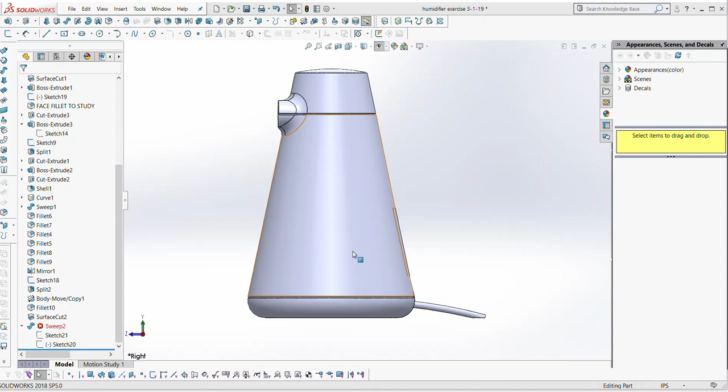As part of Project 3, I hope you guys are fully aware of this, and I think you are, but I've said it before: you have to render this to match the rendering that you have picked. So the exact piece of paper you have, that's what you're trying to match, and that's what I'm grading you guys towards, okay?

Now, in an ideal world, you would be able to find this image and find like a side view orthographic of it. Probably not going to happen, but if you can, I would start it the exact same way you started the bottle. You have that side view, you drop it in as a reference picture, and you actually trace it. If that doesn't work, you can totally drop in—I think I did it on my file.

Let me open up the original. No, this is the wrong one.

Yeah, you can literally drop in the exact picture reference, and even if it's not—whoops, let me do that. Yeah, there you go. See, like this picture was not an orthographic, but because I know it's a revolve, I was still able to get the rough angle of it, and I was able to get the rough height of this.

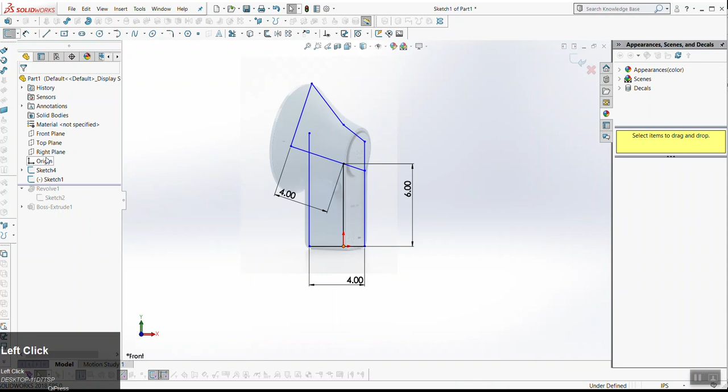And now if I rearrange my sketches so that my master sketch is below, you know, maybe 4 inches is a little wide—maybe it's like 3.75. But now I can start to try and get what this angle here equals to. Maybe this needs to poke out a little bit further.

So the way that I've built this, I've started with a revolve of the speaker area. You'll notice that some weird things happen, right? Because it's revolving at this angle from here, we get a point on the back. In fact, I would actually recommend that you build everything in halves. So in this instance, if it's a blind revolve, I would dial it into 180 degrees. Then my gut was to say, okay, if I extrude this, what does this look like? And you can see there is nothing smooth about this, right?

Now part of that is, okay, how wide should this go? So in your master sketch, let's see, how would I approach this? I would probably go to my master sketch. Honestly, I want this to be parallel to this because I want the edge to be flat, even though it doesn't quite align well here.

I can adjust this later. It looks pretty close—I can maybe move this up so it's a little bit in between. And again, it's not a true side view. While I'm in my master sketch, the other thing I want to check is what this distance is. Let's call this an even 3.15.

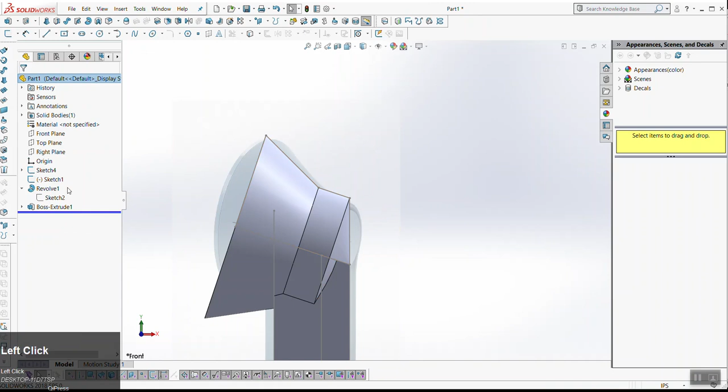That gives me the diameter of this revolve. That means then that if I extrude this, again, I'm building half of it by 3.15, it should align tangentially to here, but it's not. Oh, it is, okay. There we go.

So now we have this smoothness through here. But of course, we notice there's this gap here. The way I would fix that, sometimes in SOLIDWORKS, it's generally easier to remove than to add bodies, because by removing we can remove exactly what we want and have it be smooth.

So here's an instance where I'm going to deviate from my master sketch. Remember, the goal of the master sketch is that everything is still pointing to it. By moving these lines way out and making this perpendicular here, I now get a really nice long blend.

But now, for a minute, I'm not going to merge this result. I'm going to uncheck that. Or no, let me rethink this. Sorry, we can leave that merge.

What I want to do is just a flat cut on the back here, not from the revolve. So on this front view, I'm going to pull this line from my master. And again, I'm trying to avoid that point that I got. Hopefully you guys all saw that.

I'm going to extrude cut this. I'm extrude cutting just a line. I'm making the setting to be through all. I'm going to flip the side to cut and remove all this extra stuff from the back.

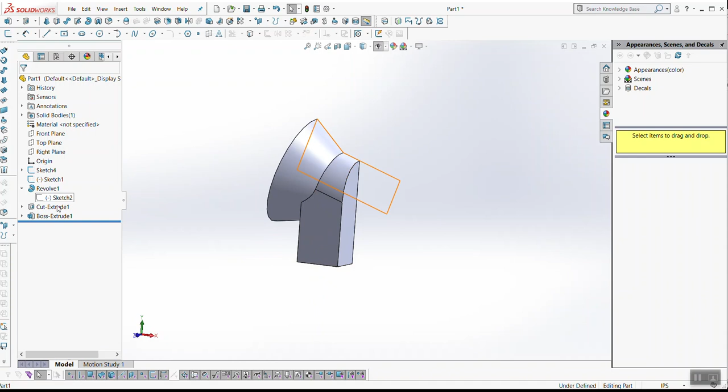No, that's great. If I'm looking at the details of this, honestly, like if this is just the starting point, really the nuance is, it looks to me like the back actually kicks slightly here like this.

So in reality, like this cut here, if you want to be a little bit more accurate, I would probably pull this part of the sketch, trim this here. And now we have this slight kick in the back.

So, okay, here's where it gets a little bit trickier now, however. Well, firstly, my proportion looks a little off to me. It looks like it should be taller.

Here's again where it helps to have this sketch in here. And now here's what I'm noticing, right? Look at, this represents the center line. And look where it's meeting. It's like way below the center.

So here, I might define this height overall. Take that away because I don't want it to move up. I just want to move just this so that it looks a little bit more centered here in the center of that disc on the back. Move this down.

But of course now this changed, so I'm going to have to change the extent of my extrusion here. So let's change this to 2.3 even. So now my extrusion needs to go to 2.3.

Let's see, what's a more clever way to do that? I could do this. Instead of always having to constantly tweak that number so that they match, I can change this instead of blind to go up to vertex, and I can select this.

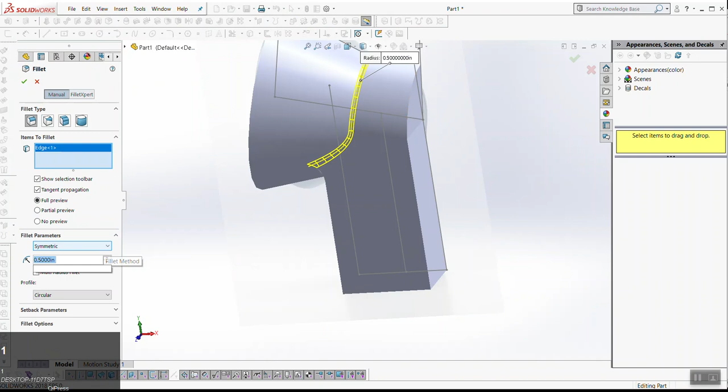Let's see, and to run a fillet along this way. Honestly though, it's probably better. Like honestly, this fillet could maybe benefit from being, what's it called, a face fillet with an even contour.

You know what, for this project, I think that's okay. This will get you close. The key in here though, that I would do a variable fillet, because it looks like it's really a big soft into a tighter fillet here.

So a variable fillet is you pick a line and then you pick two different values. Right, yeah. Now, I'll be honest, I don't love this. Really the best way to do this would be with a surface loft.

Because you get this weird point here, is mainly why, and then this transition is going to look funny. I mean, you might - oh yeah, don't do that. Look how it cuts in, that's terrible. Don't do that.

You may be able to get away with like a - let's see what just like a really small fillet in here looks like. That's still not quite what I'm seeing in this file here.

I wouldn't. You could, okay, you could maybe try and align this and this a little bit better. You see how offset those are? That might help, so if that's maybe what you meant, that's one way about this.

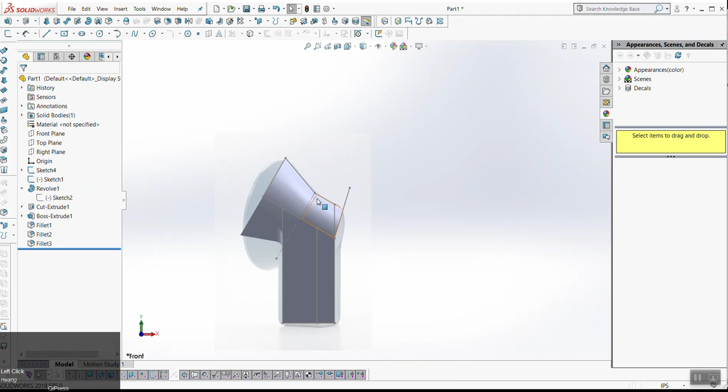Let's see. I think if we put a reference line here and make it perpendicular to this, and for construction, we can kind of align this with this gap, and I think that should align it a little bit. Let's see what this looks like. Yeah, this is aligning them a little bit closer by doing that, but now the proportion's like way changing, unfortunately.

And again, I am grading you guys on accuracy of how closely you can replicate this. Let's see that. The fact that I want this to be parallel to this is somewhat constraining too. It's not ideal.

So okay, let's look at this. How might we do this with a loft? You could use this. Okay, so I'm going to pull this line here,

and I'm going to split this. So before we were using splits to create windows and stuff. This is honestly a more proper way to use a split, is to say, okay, I have my bodies. Now I just literally want to work on just this part of the body.

You might, if I'm looking at this, while we do want fillets as late as we can get them, in this instance, again, looking at this, at the image, we have a small fillet on this edge that runs around the bottom. And essentially, we want to loft this body to this part of the cone.

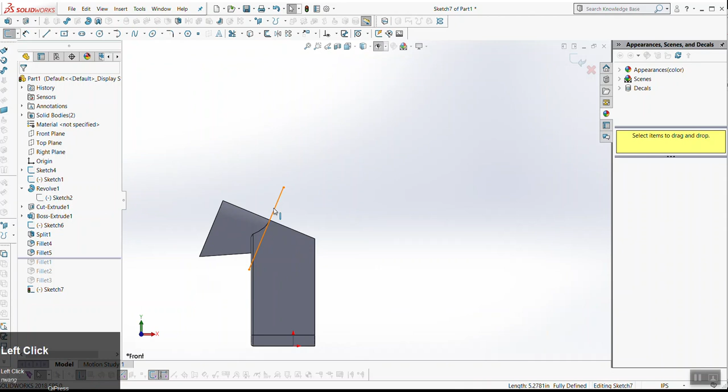We could, let me try this. I'm using this just as a reference here to cut something. You know what, actually, let's leave this. Right, this is kind of rough, but I'm just going to go for it.

I'm using this kind of U shape to cut out this intersection between the two of them, and I want to keep both bodies. So I'm going to click OK. The reason that I put this fillet in here is so that we don't have a corner. It's nice and soft through here.

So these fillets are a little bit higher than I'd like, but I could, in theory, I could now try lofting this face to this face, right? Now the key, though, in this loft, well, firstly, we probably need some more guide curves in here.

So, but this is where we could use this other body. I now kind of have a built-in guide curve right here. You would probably want... you can see how it's a bit still wonky here. Let's try this, if this does anything for us.

This is where you might want to use, well, for sure, let's see this front face, we can get a sketch going. This is an instance where I for sure would use, where I think it's acceptable to use a spline. Because I want to go from here to here, and I want this to be tangent to both.

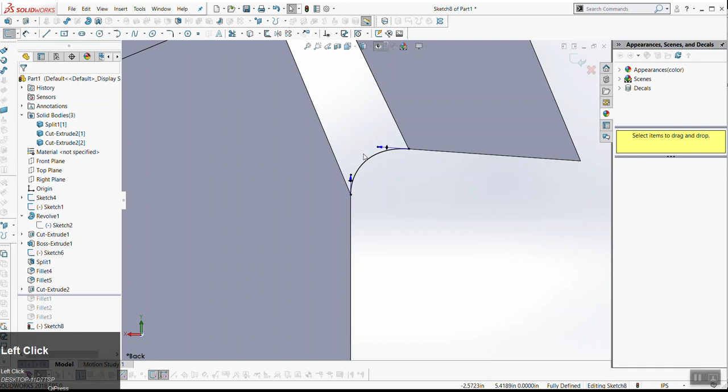And I want it to be as soft a curve as I can get, and I don't know how many arcs that would take, right? This is kind of an obscure shape. This is also where you may want to use a 3D sketch, okay? So let's start, before we get there though, let's look at this.

Let's just see where we've gotten with our guide curves here. We can use this as a guide curve. You can see this is already looking smooth. We can use this as a guide curve too. And actually, we may not need a 3D sketch at this point. That's looking actually pretty good.

We want to look at what we're merging. Are we merging the result? And if so, to what? I think we can merge to both. That's fine.

Yeah, it's not perfect, but no, it's better than what we had before. We can now see kind of like what a fillet through here is going to do. There's kind of some weird things going on but it's on the right path. I think it's better than the fillet that we did earlier.

But what's weird is that this is a bend. This is a concave bend, whereas this is a convex bend. Meaning to say that this goes in, this goes out, and filleting along that edge is tricky. We could try and add tangency to this loft.

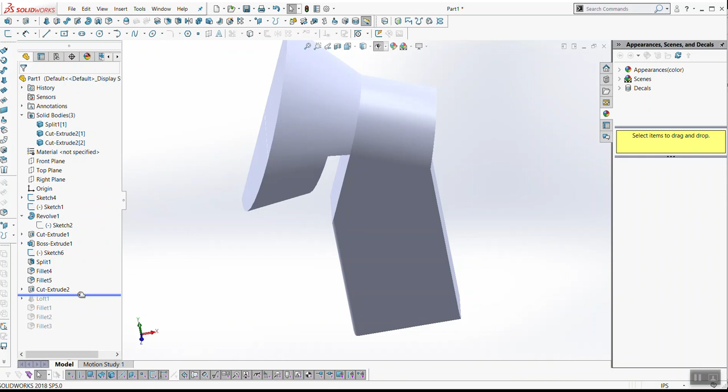I would at least rather speak towards it. Let me look at this. My hope with these exercises was to give you guys an approach and have you then fine-tune it. I think this is along the right path, you just want to tune in this loft. I think you could get away with it with fillets, like we did the first time. For this class, here's the other approach: let me blend all this back together.

Here's where you could use, for example, think about the orientation of the fillets. I put this fillet on here first, so now this gives us a more consistent blend throughout all of here. This may be an instance where you want to use a face fillet and keep this chord width symmetric and see how big you can get this. This may be an acceptable workaround for this class, without getting into more—honestly, that's probably what I would do.

In a perfect world, with more time, I would totally get into surfacing, but it's going to be too much for me to dive into and touch with everything here.

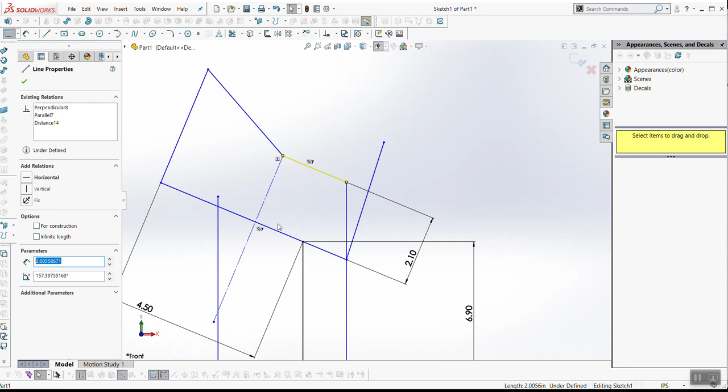If you want to look at my tree here, let me sum up the key things for you. One: set up your master sketch something roughly like this. I think it's key that this part of your cone is parallel to your revolved center line, because that's how you get a smooth blend on the outside. Essentially, your object is constructed by a revolve and an extrude. I think the key to getting this smooth is the order in which you have your fillets.

In this case, I filleted this edge here, then I filleted this corner here so that I now have this clean line that runs all the way throughout. Now if I throw a face fillet on there with an even chord width, I get a pretty even, smooth blend throughout here. It's not ideal, but it's an acceptable workaround, and it will get you a rendering that looks pretty close to what you have here.

Right. Yeah. Short answer, yes. Let me give you a longer answer.

So let's look at this, Project 3. The complete project, obviously you have the SolidWorks model, but there's two: the replica and the redesign. You will have the original render from the internet, so each of you needs to find this. If this was not the image you brought in, try and reach out to the person who has it. If any of these are my images, I will throw them on Box—2 of you have my images, 3 of you have my images—I will throw them on Box so you have them. Try and figure out who brought in the original image and see if you can get it from that person.

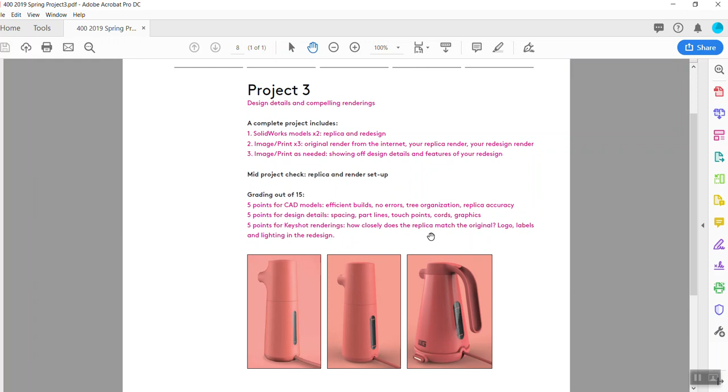And then 5 points for the Keyshot rendering. How closely does the replica match the original? And that's literally, I'm looking at both and I'm seeing how many differences there are. And you want to get that as absolutely close as you can get it, yeah. And then of course logo, labels, and lighting in the redesign. Does that answer your question?

Awesome, that's great. It's very similar, yeah. Okay, cool. Any other questions, Scott, on your model? Okay. Do this.

So Ned picked this drill. Good choice. Also going to be a little tricky, but you got this. I have faith. Awesome. You have lots of reference. That's good. Okay. So again, let's see.

If I'm looking at this as a drill, I would probably put the origin right in the center of the barrel of the main shaft. So I'm going to, yeah, thanks, Scott. So I'm going to make this coincident. So this represents the main shaft of the drill. This represents the handle. Just guessing on size here.

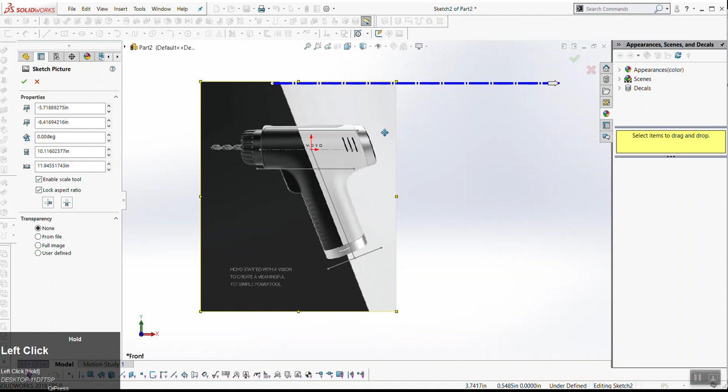And maybe I do want to align this right in the middle on that part line. And then from here I would change this transparency to, again, just knock this way down so it's not too distracting. After I exit that sketch, I can now rearrange them. I can drag my master sketch below, and now when I edit my master sketch here, I can make some adjustments to match this.

So get this to be a little bit taller. You know what? That means I need to scooch my reference sketch down a bit. That's pretty good. It doesn't have to be exact. But now I have this angle. I can pull this angle here. I can shorten this up a bit.

And now let's say I want this angle to stay fixed, because it's not going to change. I can just throw in a quick dimension here. It looks like it's really close to 70, so I'm just going to round it. Okay, no, that took it way off. Let's make it 65, see what that does for us. There you go. So now you could literally trace this out. And again, this is all very similar to what you did before with the bottle. You want this to be tangent.

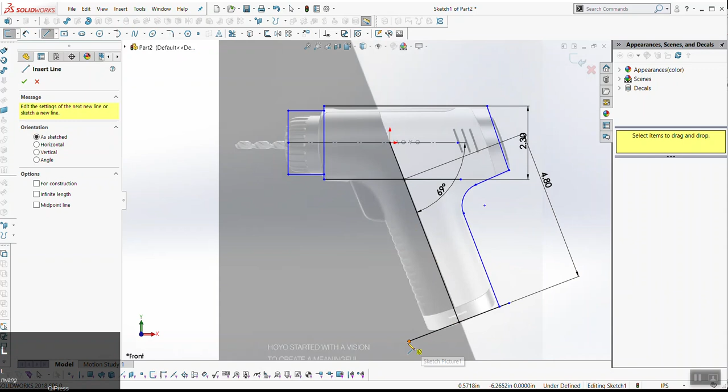So if you guys have any common elements in your object, you can use GrabCAD. That's totally fine. And in fact, we're going to use GrabCAD a little bit for Project 4. Okay. I'm going to continue with this. Is this all making sense so far, right? Nothing crazy, right? Okay. So that's roughly what the master sketch looks like.

I think it would be best to have a plane down here to represent your handle. So again, guys, to create a plane, you go to Insert, Reference Geometry, Plane. In this instance, I typically like to create planes with two references: a line and a point on that line. Or I guess it could be a curve. Basically, what this does is it makes the plane perpendicular to that line. So this is our center line of our object, but now this becomes the base point of this handle.

All right, so we can make a couple assumptions. One, we're making the assumption that this drill is round, the main body. But if I look at the handle here, oops, I'm building this from the front view. You guys notice this line, how it curves and then it goes straight and then it curves again? It's like a slot shape. So it's helpful to make some of these observations. It's going to help your rendering and lighting look more realistic, the more accurate your model is.

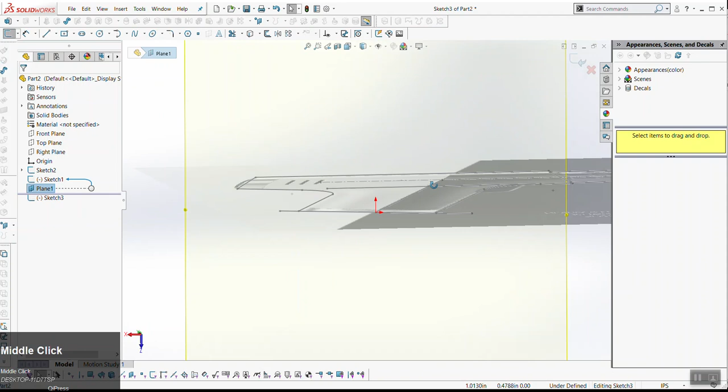So on this handle shape, actually wait, I'm doing myself a disservice. In my master sketch, it's going to be helpful for this bottom length to be the exact width of that handle. Because now when I do a sketch on this plane, I can just grab this line. So even though we have all this mess of lines here, I know this is exactly how long my handle needs to be. And so again, this is where I might use this slot tool. Make both of these points coincident.

And this is where it's helpful to have some general knowledge of product dimensions. This handle is probably at least 1 inch wide. Let's call it 1.5 inches. That's a very long handle, though. Okay, so I maybe need to revisit my proportions here. To let you guys into my head, we matched this trace front to back, but this is a dimension I did not pull. It helps to just double check yourself. I don't see a ruler lying around. Oh, great, thanks, Alexis. So think about it. 2.4 inches, that's a really deep handle for a drill. Think about grabbing it. That's not very comfortable.

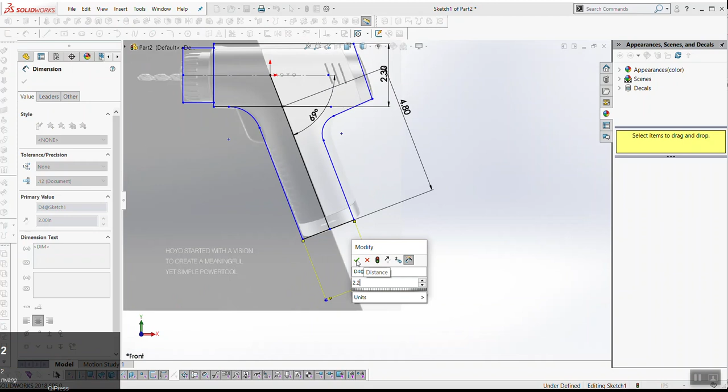So, a couple things. One, you can just tweak it overall. I wouldn't make that bigger than 2 inches. Say again? Yeah, that's true, I guess, you're right. Again, you could go to Home Depot, look at a drill, get a measurement there. So fine, let's pick a middle ground. I still feel like 2 inches is big, but let's just go to 2.2. That's still pretty close. We can slide this back a bit. All right, that's cool. I'll buy that.

And then maybe that tweaks how wide you want to make this. You know, I guess 1.25 inches. That makes sense. All right. So now at this point, this could be a new master sketch for the handle shape, or it doesn't have to be. It's up to you. Because it is a slot, I will leave it as a master sketch for the handle. So I'm going to make a new sketch on here, and I'm going to copy this over, so that I can now trim this.

And again, I encourage that you build this in halves. So this is what I'm going to extrude. Why am I not? And I want to extrude this, again, here I can say, hey, I want it to go all the way up to this point here or something. Or no, I guess here's my origin. I can have it go back to the origin. And now same thing here from the right view.

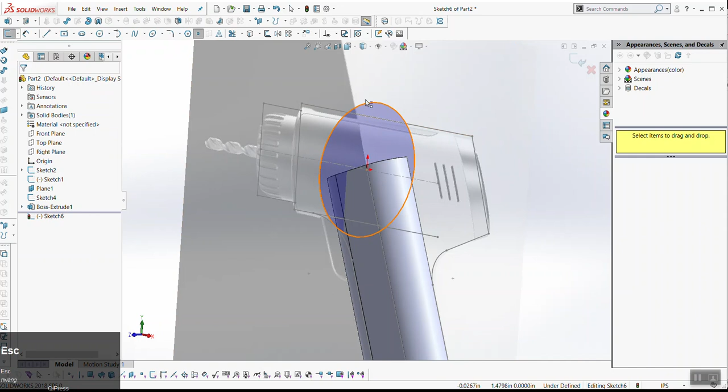Like I said, we're making an assumption that this is a circle, because we know it's exactly in the middle. So if you want to have an intersection of a circle and a line, you need a point on there. So I can drop a sketch point onto this circle, make it intersect with this line. Or I could have known I was going to draw this line through here. So you can see that this circle now aligns with this top and bottom that we have defined.

I can extrude this again up to vertex, this here. Again, because I'm now matching it to my master sketch, and up to vertex this here, the further one, because we're going to cut this at an angle. I don't want to merge result quite yet. I mean, I guess we could look at that. But you'll notice, look at what's going on here with this blend. Here, I'll give you guys an example of maybe what not to do.

Let's just say we merge our result. It's very tempting to just go ahead and be like, I'm just going to fillet the shit out of this and see what happens. Why is my Alt-B not working? It's really frustrating. Okay. Maybe this will work. Let's see. Again, in terms of best practice, that's actually pretty close. Okay.

For this class, it's okay to use fillets in this way, right? Because this is kind of a more intro to solids class. Please, guys, for your design career, do not design with fillets. That is not good to do, okay? A fillet is supposed to be a finishing feature as much as possible, not a main feature.

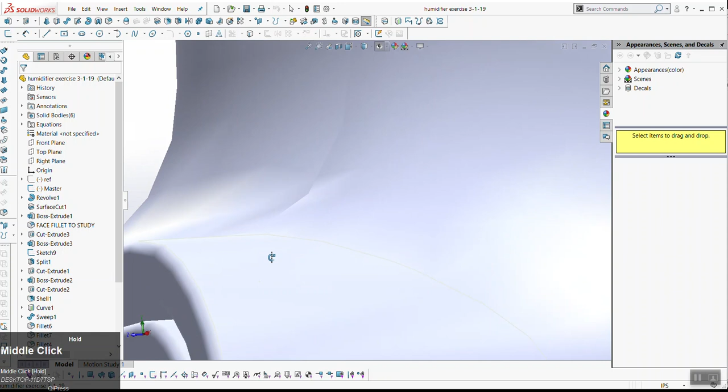Where this fillet isn't good, if this is going to production and stuff, is it looks like there's a bit of a seam here. I don't know if you guys can kind of see that. It's a line right here. You can kind of see where the fillet starts and stops. It's very clear. Whereas a loft would blend that out a little bit better. It all depends on the amount of time and accuracy you're going for. Okay. This is pretty close. I would recommend against it though, with this fillet.

And the reason why is if I'm looking at this, look, this is a lot tighter through here. This one looks pretty close. But look at these lines, right? Honestly, these contour lines tell a lot of the story. That's a weird contour line. Look at how that jumps up like an S, kind of like that. So again, based on this object, firstly, I would not blend these.

Keep an eye on time. I need to wrap this one up soon. I got 5 minutes.

Let's see, this ended up lower. That's interesting. Okay, what do I do here?

Let's see. All right, well, firstly, I want to chop this angle. My hesitation now is that this doesn't quite align, so I'm going to do a slight tweak here. Let's just see what this looks like. Again, I tend to do cuts like this with straight lines, doing through all in both, and making sure the arrow is pointing the right direction, making sure you're cutting the right feature here.

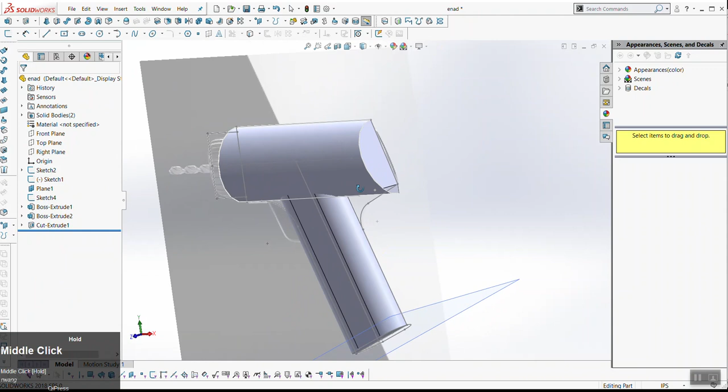But what I'm hesitating about, honestly, this is going to be smoother if I just do it like this, is I don't like that this cut is happening in the middle of this circle. I want a nice clean face, a full circle to go to. So I'm going to just tweak the design slightly. Again, I think it's okay to do this.

I want a line that's parallel to this one because I want it to be at the right angle, but I want it to go through this bottom corner here. And again, my reasoning for that is so that I have a nice clean round face to go to here. Before I had that awkward, you saw that at the bottom. So now essentially this object is two lofts.

So what I'm going to do here, I'm going to split this object a couple ways. On my front face, I'm going to split it horizontally like this. Again, splitting top and bottom. And then I'm also going to split using this line, and again, just kind of elongating it. This one I'm going to split front and back.

Can I split on multiple objects? I can. Hopefully these don't merge though. I'm selectively choosing my splits so that they're not touching because I think SolidWorks wants to merge bodies. So you can see I picked front, back, front for what it's worth. Okay, that didn't work. That's not what I wanted to happen.

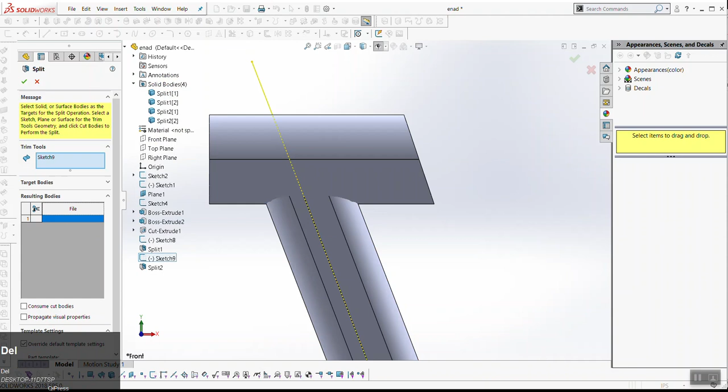Here you can use the same trim tool. You don't have to make a brand new sketch. I'm going to grab this sketch again, and here I'm just going to split. Oops, not the face. Again, easy mistake to make. You want to make sure you're down here in this dialog and select this front. And so now I'm looking at where these lofts start and stop, and that's what this is telling me from my master sketch.

I'm going to make a sketch on this front face, and I'm going to pull a line here, perpendicular to these straight lines. Same here, perpendicular. I can actually copy this over. It's not necessary, I just need to connect them. But what I'm doing is I'm going to do an extrude cut now. Again, it's an open contour, so it's a thin cut.

So again, I'm saying it's cutting through all and telling it to cut the inside away. And what I'm doing is I'm cutting these two inner bodies away, so that now I have this space in here to blend this face to this face. You see that? You're going to do the back the exact same way, but let's just focus on the front for now. So firstly, I'm going to pull this line because I want this to guide my loft.

But now here's an instance where maybe I'm going to call everyone to pay attention. I'm going to introduce 3D sketches, okay? So Anand is trying to loft from his handle to this main part of the drill. Let me just hide this. Well, no, maybe that's fine. I pulled this curve sketch to help with our loft, but it's going to be helpful to have part of the sketch here loft from this point to this point.

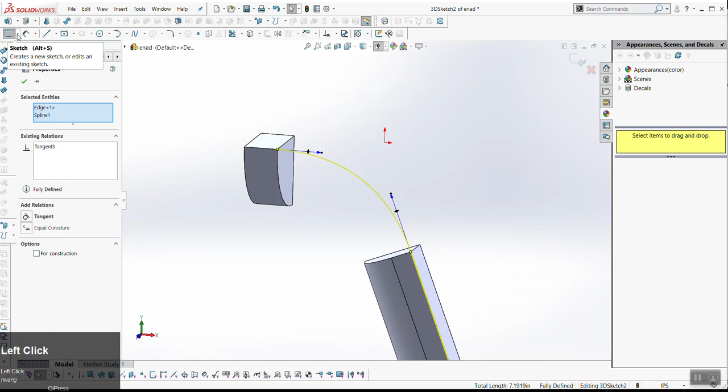To exit the 3D sketch, if you click on here, you can't. So if you forget this, it's frustrating, you wonder why you can't get out of it. You could always click on that there, but the way to get out is to use the drop-down menu and select that.

So basically, just introducing 3D sketches, a very simple way to use it is to pick two surfaces that have straight lines, connect them with a spline, and make the spline tangent. It will make a smooth curve through space. That's the only new thing I wanted to introduce.

So if you guys are working, you're welcome to go back to work. But if you want to see how I apply this now: I select this face and this face in my loft, and I can select that 3D sketch I just used. Now I could select this, but I want to make sure I don't accidentally select the master sketch, so I want to expand my tree and make sure I select this sketch here. Now you can see, look how smooth that loft is.

You could add constraints and say normal to profile. Now let's see, why did that blow up? Let's say this also normal to profile. Oh, because this got twisted. You always want to make sure these points go correspondingly, so really this blue dot should be here, right? These are the top right corners. But this normal to profile seems to be goofing it up.

If this is happening for you, like this loft, it means I need another guide curve. It would be helpful to have another guide curve from this point to this point. It's not allowing me to select, I'm trying to select and drag these. That happens sometimes, I don't have a good answer for why. You can also try reselecting the face, and sometimes that corrects it.

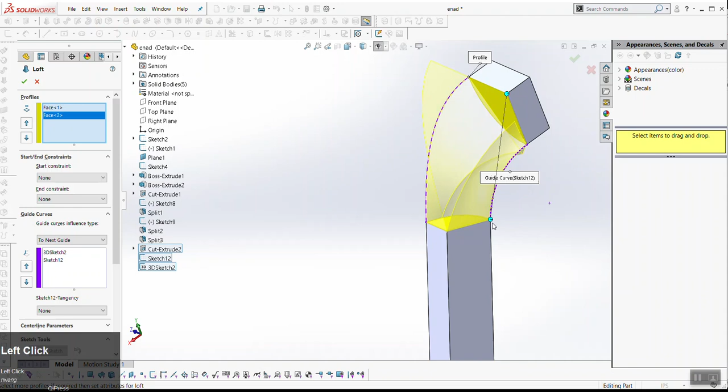Why is that jumping? That's really weird. Yeah, you can see weird stuff going on right now. It's okay if that's happening, but I'm taking too long on this one. Again, I can connect these two.

Again, I'm using another spline, because I'm not confident a single arc is going to blend these, and I want the smoothest transition possible. There's no vertices in the spline. I'm using this straight line in the spline and making them tangent, not pushing and pulling on this arm, making this tangent, not pushing and pulling on that arm, trusting that's the smoothest arc through there.

Now once again, if I loft this face to this face, and now I start to pull some of these guide curves, now that I have 3 defined, that's really all the corners there are. I can now check this, and now that's a little bit smoother. Does that make sense?

Now, unfortunately, I don't have time for this, but you would do the same on the back. You are going to be left with a gap in the middle here, and in fact, you can see, oh man, yeah, that's going to be a problem actually.

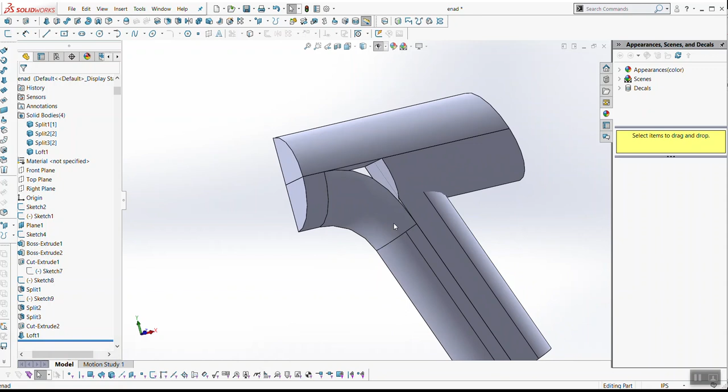This is where surfacing in theory would come in. You'd go from, you see how this necks in like that? And how this is wide and this is narrow? If I show you a top view, it's going to be more obvious. That's the challenge, so your loft may need to go from this face to your top face instead of this face to this face.

If I roll it back before this loft, this is how I would start it. Same thing in the back, I would split this cut. For example, you may need to loft this to the top.

Here I'm going to show you surfacing very briefly. It's really similar, so pay attention if you want to see something new. If you don't have this toolbar, go to Tools, Customize, shortcut toolbars, and check Surfacing. It should default to appear here.

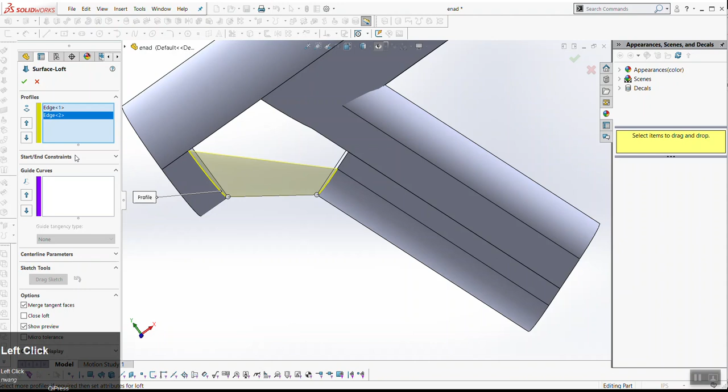So if you just watched this demo, it was lofting this face to this face on a 3D body. You can also loft edge to edge, so this is a surface loft. For profiles I can pick this edge and this edge, and provided I line this right, I can make these tangent to each other, which gets me a nice loft this way.

Now I can do another loft using surfacing to go from this edge to this edge, though ideally it would only be between these two. There's not enough time for surfacing, but the way you could do that is sketch a line exactly in between here, and loft from that line to this edge using this as your guide curve.

It's not working because of this point here, but you could use tangencies. This is tough, and again this is how you'd go about it in an ideal world, being kind of an intro to SOLIDWORKS class. I can get in depth into surfacing after going through each of your files if that's something you'd like to see. But that's ideally how you'd go about this, right? It's lofting edges to edges.

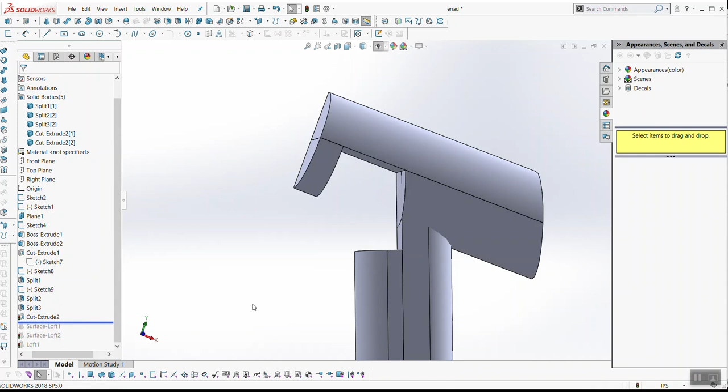But if this doesn't work, the fillet option will get you close, just know that's not the ideal way to build things. Does that make sense? I would try to split it out this way and play with these lofts. The first way I built this with solid body lofts may still work.

You just need to control your loft, try to pull this body out further. The way you might do that is with this 3D sketch, pushing this out. This is where you may want to pull this handle out further. But the problem is it kicks backwards. Oh, absolutely, oh, the ruler, thank you.

Any questions on any of that? My goal is to give you guys how to start, and then you fill in the gaps. It is a pretty complex object, partly because of that loft going both in and out.

Here's another way you could simplify it: if you brought the handle in a bit, so maybe the top is as wide as the handle. Not ideal, but it would simplify things by taking away this left-to-right jump. If you align those, it'll make your life a little easier, so just get it as close as you can, and if you have to revert back, that's okay.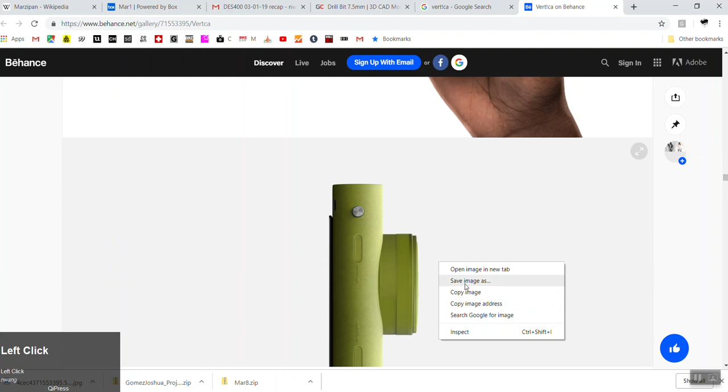So again, this is one way I would recommend you guys start, is grab as many of these views as you can, because it will make your life easier, especially in setup.

What would be really nice is if they had a view of what it looks like from the top, a straight top view, because then I'll know exactly the size. Oh, there's also dimensions too, which is nice.

You think there's an exact top view on the bottom, towards the bottom? Okay, cool. Not that one, right? It's actually orthographic. There you go.

Nice, no, this is perfect. This is exactly how you would want to go about this. So, all right.

So actually the nice thing is that this one did give us dimensions on here. I think I saw it at some point. Yeah, here we go, yeah, 85 millimeters by 150.

So again, any place, if you find that, it will make your life easier. 85 by 150.

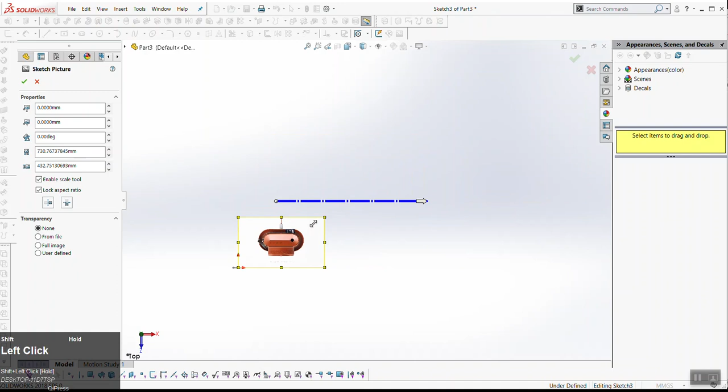And then now from a top view, I can import the top view sketch, and then scale this to match.

And honestly, that's probably all I need for this. The side view could be helpful, but no, we have that in the top view.

So really at this point, I could drag this sketch down and this becomes my top master, which actually, honestly, it's a little late now. I would probably have centered your lens on the origin, would be my advice. But I already have this set up this way, so I'm just going to run with it for now.

Actually, what this doesn't tell me here, where the side view is helpful, is to know where the lens is located. Does that make sense? Let me look at that sketch again, or that image again. Unfortunately, this isn't a full height, it only gives us the width. But it would give me this measurement of here to here.

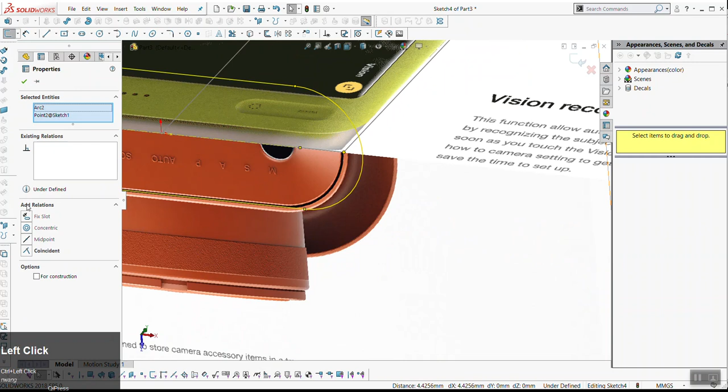So here's what I would do, if you're all for the name of accuracy. From this top view, I could make a slot shape on this sketch that matches this point to this center arc, and same here. And now I can give this dimension.

And again, you just want to be close. Like you don't need to be exact. It looks like I'm inboard a little bit, so maybe I need to get a little bit wider.

But the reasoning for giving that depth is now if I want to put in this side view image, oh, it's a GIF, so I would need to convert that. I can quickly do that conversion by just doing this.

Now, something's interesting going on here, this little thing, I'm not quite sure what's causing that. I'm assuming it's because the lens starts to interfere with the top of the slot shape. It's a good object, made of primary shapes, but it's kind of straightforward, right? It tells you what it wants to be, which is good. It makes your life a little easier, which is not a bad thing. Again, it's all an exercise in studying form and studying rendering.

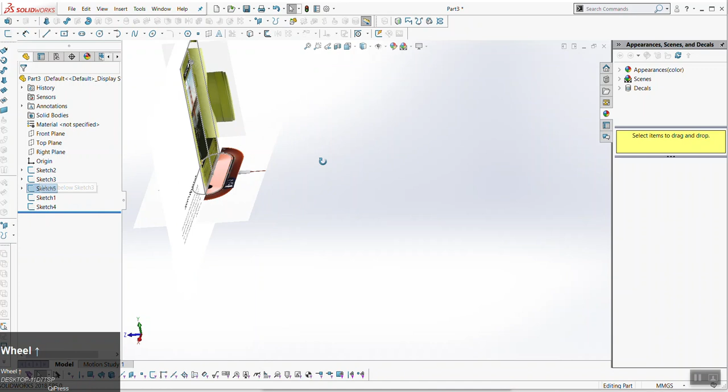I think this is all pretty straightforward stuff. It's basically just saying, hey, you can use these sketch photos or these photos as multiple reference points to your build. So on your front master, this will again tell you roughly where to put the lens. If I look at the side view, it kind of tells me how big the lens should be, right? So let's see how...

You know, maybe it would have made more sense to put that side view on the front face so that I can actually see that, like aligned next to each other. Another way to do it would be, before doing this sketch, to actually do a right plane sketch, and I can just quickly pull these lines as reference points.

And honestly, you know where this is also going to be helpful is when you add all these details into your build. So your overall form is pretty straightforward, the complexity of your form is on all these details that you're going to build in. But essentially, it's like a series of extrudes and extrude cuts and so on and so forth.

But now that I have this side reference, when I go to do my front sketch, I now have these points in space that I can kind of attach this to. So I can say, hey, I want you to be coincident. I can get rid of this dimension, and make this coincident down here. Now, hopefully these renderings are accurate. They should be, it should steer you in the right direction.

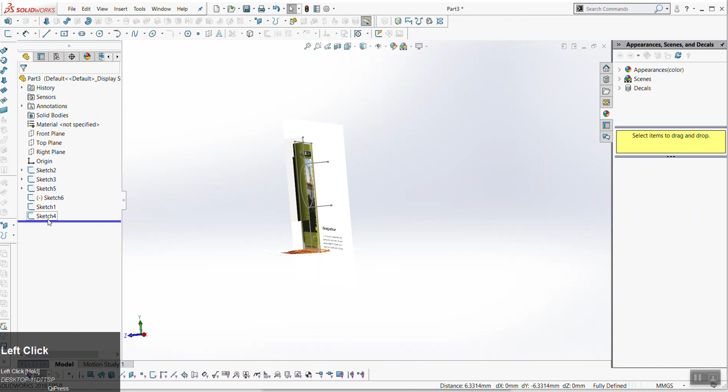Okay, so here's your top view. Ideally, in this instance, you do have a top master. Other things I put in your top master are like the size of the tray, if you're building that, which I guess I wouldn't—let's see, if you're matching this rendering, I would. The trick with this rendering is going to be the lighting, having that glow coming up, but that can be done with an area light.

So let's say we set up our master sketches. I mean, I guess I should demo this. So from this view, other things I would put in the master are honestly like this port here maybe. You could start to offset this to get some of these gaps. So again, what I would do is if you're selecting this whole slot shape, you can right click and say select chain, and say offset, and maybe it's about 1 millimeter.

There's a bit of a gap on the inside, offset also about 1 millimeter inside. The bigger tray I would probably do as its own. I wouldn't do it as an offset. I would do it as its own slot shape. But again, just basically aligning this.

Now one thing I did do wrong here is that I offset wider here, and this first sketch did align up and down with this edge here. Bless you. And again, that's because I didn't quite align this top image fully to the edge of it, to this line truthfully, right? Like you can see this is a bit wider than where this line is.

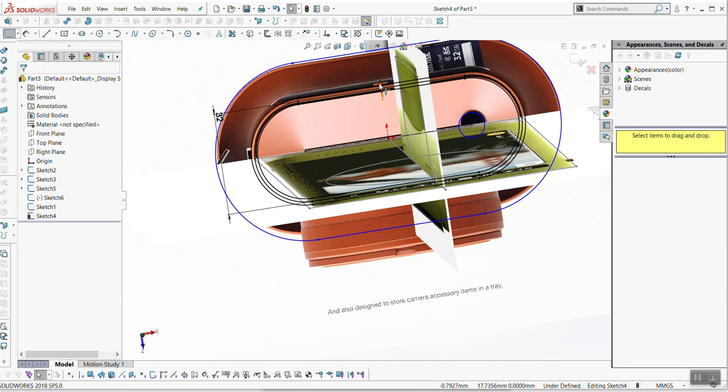So okay, if I were to correct that mistake, instead of offsetting away 1 millimeter and inside 1 millimeter, one of them I'll offset always to the inside so that the farthest edge will always align. You still with me? I realize I'm kind of jumping here. Actually here, I'm just going to delete this. And I'm actually going to offset this one here. Okay. So that's just to simulate the master sketch. I think you get that.

So okay, from the top view, at a very basic level, I want to extrude this slot shape all the way up to, again, I would do up to vertex and go up to here. Again, you could see this as building half the sketch, but let's see. For you, maybe it makes sense to build it all as one whole because the lens doesn't get mirrored, right? You could build it in one half left to right, not front to back, is a possibility.

Let's see, this lens, we know how tall it goes this way. Again, I would typically build the camera coming towards me just the way that I set these up. I didn't plan ahead quite well enough. Again, if you do have a side master, this is where you could tie it to it and have it go up to this vertex here. The question is whether I would merge these bodies. I don't know if I would just quite yet.

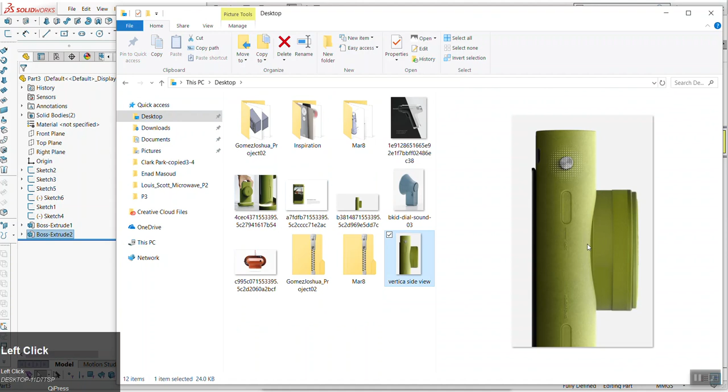And now we can look at what this intersection looks like. Because on one of these images, you see that blend like that there. Let's see how severe we're getting this here from this side view. Kind of getting it. It's not quite as big as I anticipated. I don't know, nuance like that, it is a little bit how it matches, yeah.

Let's see, the bottom tray I would do as an extrusion. I would fillet the edge and then shell it. Then this light, I would probably just do that as a split. So let's see, is it in our side view? No, it's not. It doesn't go quite that low. But if I hide this, it is in this view.

So again, in this front master, I could have a line across here that tells me that I can align with this bottom line and the top. I'm looking at the light on the bottom, right? And I'm using these two horizontal lines to tell me where that arc goes.

And from a side view now, this could be in a side master, after I sketch it on this right plane. I see these are the 2 points that I created. If I have 2 horizontal lines that are aligned on these points, coincident to this, essentially it's kind of like a split with an arc between these two lines.

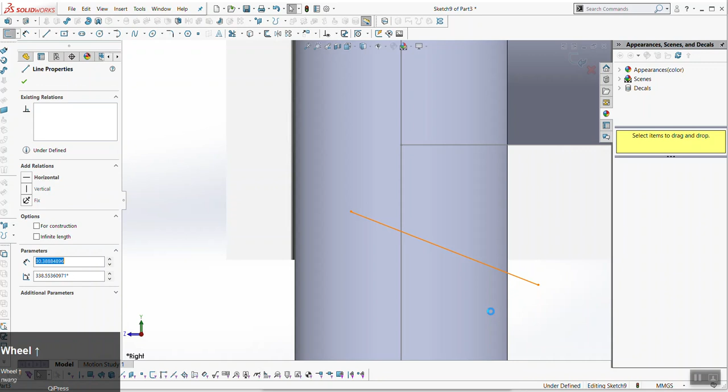Because it doesn't go all the way through the body. So sometimes, in this instance, I'm trying to split it with the arc. Because it's coincident to the edge, sometimes you need to add these little ears on either side that make sure that it goes all the way through. So now here I'm going to use my split command. It defaults to that sketch I was just in.

I'm going to select this. And now if I go to my bodies here and change this to, oops, not that one. Change this to transparency, we get a light that looks similar. Does that make sense? Do you have any specific questions?

Yours is pretty straightforward. Again, I think the difficulty with yours is getting all of these extrude cuts and stuff. The Vertica is a 3D feature. Is Vertica a real brand or is it made up? Okay.

Here, let me just show you this because this will be maybe a new thing for you. I just created a sketch on this, and this is new to everyone. So if you guys wanted to pay attention, now might be a good time. If you have any text that's three-dimensional, you can draw a line, make it for construction, and then there's this little sketch feature that says text. I've selected the line, and I've clicked that text feature.

So now if I write Vertica on here, it puts it. Now you can change your font, right? It says use document font. If you uncheck this and click on font, whatever font you have on your computer, it should load it. That's terrible. And of course you can play with the size within here. All right, I think you guys get this.

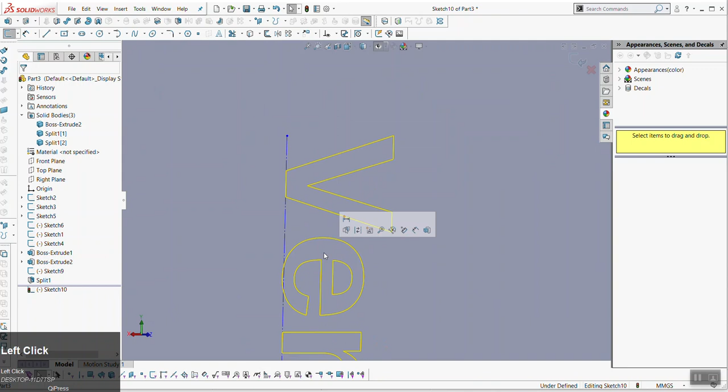Here, let me try this. Sorry. To edit it, you double click on it. Let's make it bigger and see if that helps us. I'll be honest, I don't know why it's not extruding. Oh, here we go. I believe this is causing us an issue. I don't know how to fix that. I will just pick a different font.

There we go. Okay, now this looks hideous. Now let's try and see if that fixes our problem. There we go. Thank you, SolidWorks gods. You're not making me struggle too much with that. Okay. Cool. Does that make sense? Okay. Yeah, please.

Yeah, absolutely. How to rename them? Oh, if you click on it, not a quick double click, but select and then select again, you can type whatever you want. That works for any feature. You typically don't need to do that. What I'll do sometimes, if I anticipate someone else working on the file, where I start working on the lens, I may rename the feature lens start.

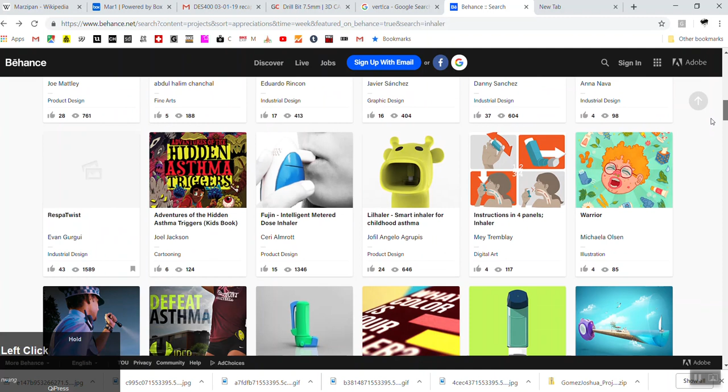I'm wondering if it's one of these. It's just not the leading image. I thought it might be this one, the graphic looked the same, but it's not. It must be this egg. Yeah, no, it's not. The other thing you're going to want for this one is you could try GrabCAD here. Oh, for the albuterol? For the albuterol, yeah.

So you could if you wanted, but honestly, at this stage, it might be easier to, it's just a revolve, really. Yeah, I was going to say. Just some arcs and... So you, yeah.

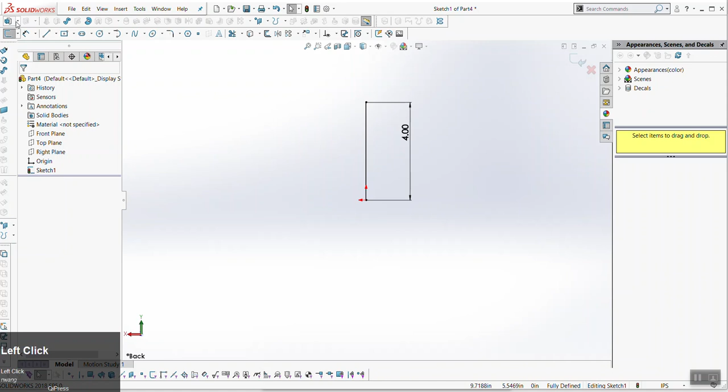All right. Let's see if we can find, did I spell albuterol correct? That's what I had, the white one. That's actually pretty cool. I loved it, yeah, because it was like transparent, so you could see some part, not too opaque. It's a nice design, actually. But here, let's just go with this. Okay. So we set this up all the same way. This is all familiar to you guys now. Bringing in the photo.

So this one, even though it's shown upside down, my gut would be to build it the other way. So we would rotate this by 180 degrees. And again, look at roughly how tall this is. Probably about 4 inches. That makes sense to me. So maybe it's about this big. And again, I advocate for taking this and changing the overall transparency, just knocking it down.

All right. Now the same thing, now that we have that, we can drag our initial sketch for height and turn this into our master. Now, this is going to be very similar to the drill in that you're working with a couple lofts here. But man, this one's also going to be tricky, honestly. You guys got this, though. You can do it.

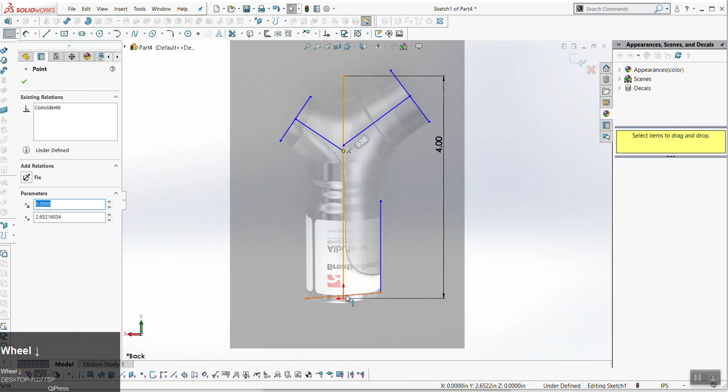So the albuterol should be relatively straightforward. It's just like the bottle, right? I would see what's going on here. I would trace these. Again, it's up to you. If it were me, maybe leave that filleting. You could do all the curves in here. You could do the filleting last, whatever you want to do. But does that make sense? This is pretty straightforward, right? And then you would revolve this as its own body.

Now the main crux is getting this part of the body. And this is a little bit trickier because you do have this very beautiful split line through here, but this is two arcs. Making this tangent. Now again, it's going to be the same. On a very base level, you could probably fillet this, but it wouldn't be ideal. And again, in an ideal world, you wouldn't be just filleting this.

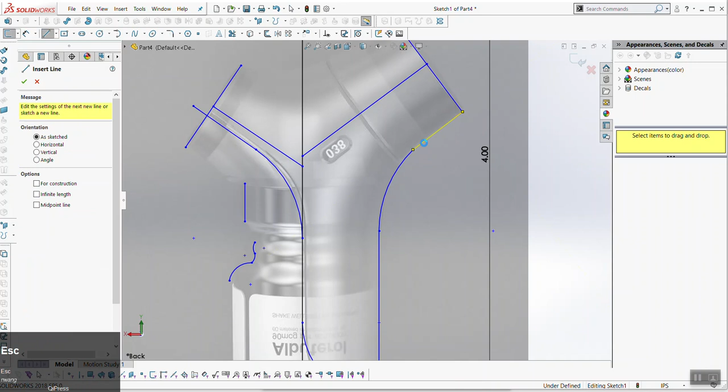This might be a spline with just how that curve is looking to me. But again, I do try and avoid them when you can. They're useful when you're trying to get a very smooth blend from two points, one to another, and you don't want a bunch of arcs in between them.

I mean, if you really wanted, you could even just dial in whatever that is. Okay, rough representation of what your master sketch might look like. It's kind of like this split tree. Again, just like the drill, I would go Insert, Reference Geometry, and drop some planes in here on each of these.

And again, the way that I like to do that is I select the line and then I select the point on the line, and it exists on that point and it's perpendicular to the direction of the line. Now we have the lengths, or the width, of each of these circles, essentially. So on this first plane, I'm going to sketch a circle whose diameter is equal to the length of that line.

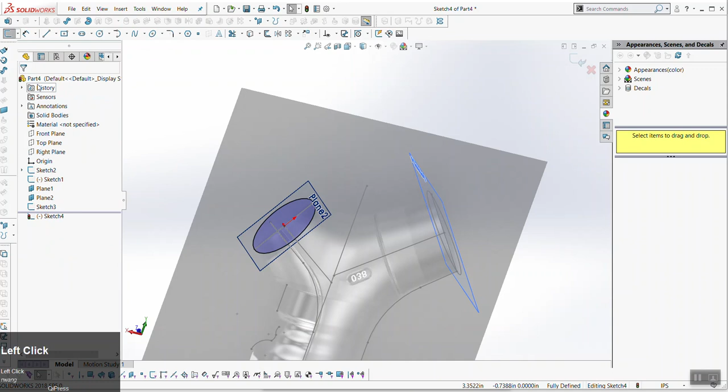On this, same thing. Sketch a circle whose diameter is equal to this. And again, this is at a very base level. On the top plane here, sketch a circle that's coincident to this. Now using this sketch, we're going to extrude.

Now honestly, I could probably do this as a revolve to get the albuterol. But in this instance, for now, I might actually go up to this vertex, again because we're trying to get this lofted blend through here. And then same thing with this sketch.

And here's where you may want to use this. You may want to draft outwards. Remember I set this to be 92 degrees, or like 92 and a half. That's one way that you can get this to get wider. Now again, I'm going to be honest with you, that was a good observation and good nuance. For simplicity, for that build, it's so subtle that it will make your life easier to not worry about having it get that wide. Or you could always put that in later with how you approach your sketch. So I'm actually going to dial this back to 90. Here's my reasoning for that.

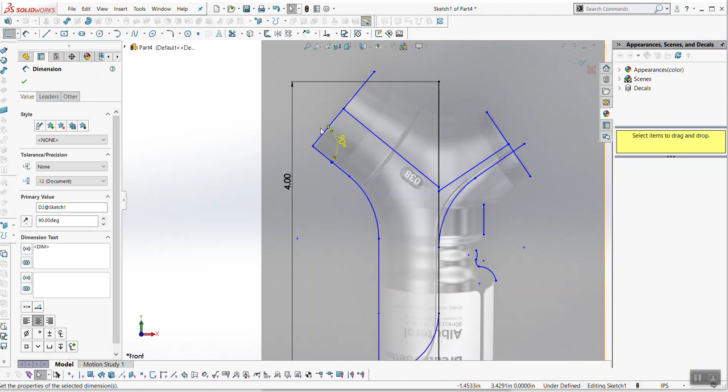The only way to do that, if you really wanted to, would be to dial this into a precise number and to extrude that circle at a draft that matches that number. Does that make sense? Yeah. Okay. So again, my advice is that observational nuance is good, but I think it's so subtle in this instance, given the complexity it's going to add to this design, that honestly I don't think it's worth it.

So again, here I'm going up to this vertex here. So again, this is where I would split these. I don't know if this is going to make things disappear. Thankfully it did not. But do you see this here? This is where I would loft. And again, instead of extruding full circles, it might have made sense to extrude halves or quarters.

So, for example, I am going to use this front plane. I'm just going to cut away half of this. I'm using the front plane as a surface to cut. I've now split these bodies. Not only have I cut it in half, but I've also split it into a quarter. This simplifies the loft for us from here to here. And again, this is very similar to what we did with Inad's drill.

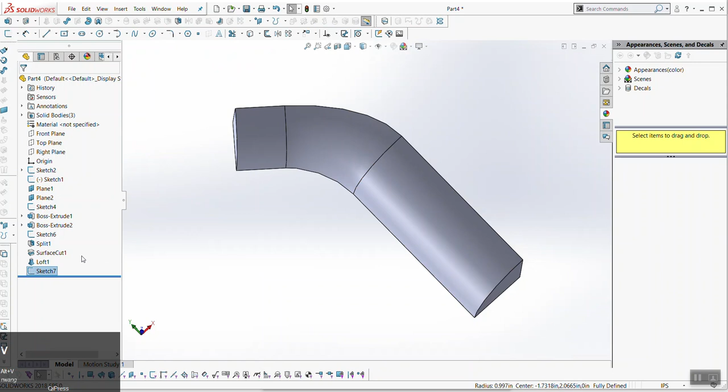Now it's not happy with me. It's possible that, no, this should have missed that. There we go, I think the tangency is not happy with me. Let's try this one. So once again, it may make sense here. I would probably do a guide curve on this back corner and a 3D guide curve on this inside. Again, very similar to the drill. But it wasn't happy with me adding that guide curve, and now it's completely jumping, which I don't know why that's happening.

Weird things like that happening - if you take the time to put all those guide curves in, that's going to prevent that from happening. Essentially, you would do that for each of these others. So this one, you would loft to the bottom quarter of this here, and then you would loft this to the bottom quarter of this one here. The same problem is going to happen where you're going to have this triangle gap in the middle.

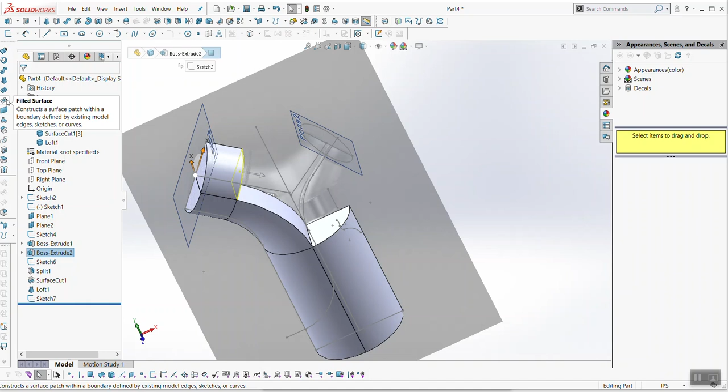Yeah, you would use a boundary. Yes, you could use a boundary fill. There's some basics to surfacing where you do have to knit it at the end. But I guess for the render, as long as you have that surface, you can apply a material to it. So, to your point, you would have a triangle in the middle here. You could use a boundary surface to connect that triangle, and as long as they're tangent, you're going to get something that's close.

On a very base level, if you're frustrated and none of this is working, I think extruding all these cylinders into each other and carefully filleting them will get you close, if you're really frustrated, as a workaround. But best practice would be to do it as these quarter lofts and then blend it at the end with surfacing. Does that make sense? Yeah, okay.

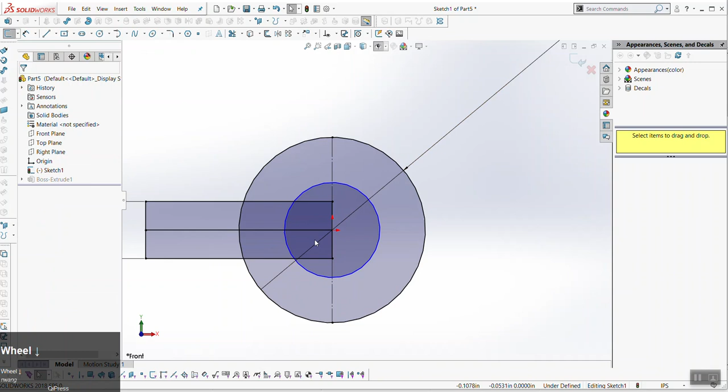But now if I'm studying this, it looks like this does not meet exactly in the center. I'm breaking this relationship here with a trim on the center line. I still want this to be coincident to the origin. I'm just trying to get it off center. Whoops.

I'm judging the tape from a side view. It's a loop within a loop. The tangent edge of that loop on the inside, I don't think matches to the center of the tape. It's slightly off center. Right, I'm drawing the side view. Does that make sense? It's all about trying to set this up in as clean a way as you can.

So now, here, now that I've broken that relationship, I want these to be equal in length. But now this is blue, so I can kind of drag this in. This is probably something that you're going to want to change here. But this is equal to.

So before I do that extrusion, it may not hurt from this top view to get this extrusion in here. Or sorry, to get this sort of, what's it called? Like a top master, essentially. And now that we have all these reference points, I can now make all of this coincident.

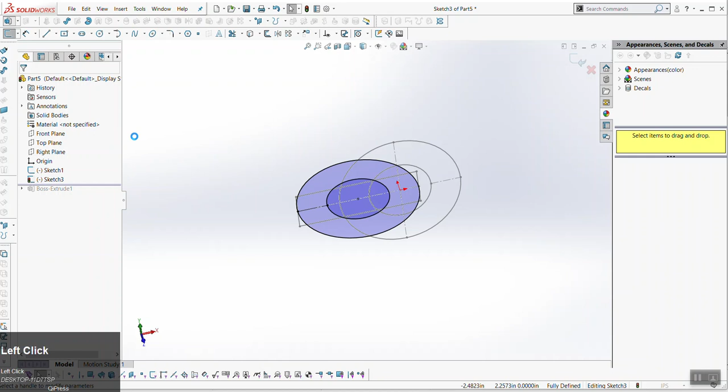And now this circle is 100% driven by this other circle. Do you see that? How those relationships play off each other? Okay, and now here, same thing. I can let the vertices on this shape also define how tall this is.

Make sense? Basically, they're both extrudes. I just showed you how to set up the two sketches so that they relate to each other, so that whenever I go into this sketch and it turns out that actually this is like 2 inches in diameter, and maybe this grows too.

Make sense? The rest of the stuff you would just do with extrude cuts and details. But basically what I'm looking for is that you should have a slight step to the inner spool of the tape. If we look at this, it's better shown on the computer since I'm recording this.

Like, yeah, I would have this white line right here. It's incredibly nuanced. I would have this edge step out of the tape slightly, ever so slightly. And then obviously you have an extrude cut in here, you have an extruded face on here. This is done with an extrude cut, this is done with an extrusion.

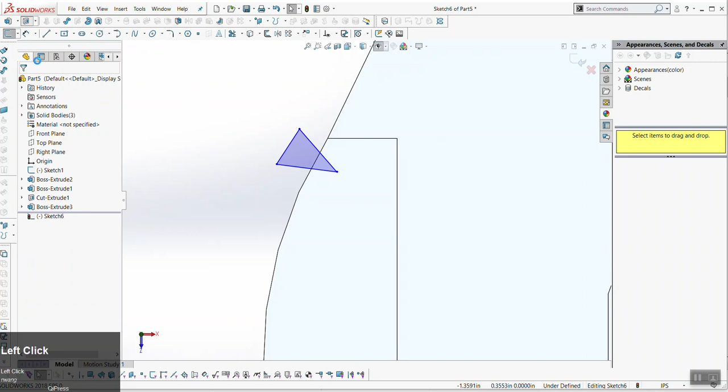So one workaround, and if anyone wants to pay attention now, here's a new feature for you guys. Mari has to do a bunch of teeth on this front edge. She can do it by just doing one cut through all, selecting the body she wants to cut. She can now take this feature and have a curve-driven pattern. This is a new feature I'm teaching you guys right here.

It's basically different types of patterns you might want to do. In this instance, she's picking curve-driven pattern. Because I was already selecting the feature in the tree, it's checked in here and it's down here. What you do is select the curve or the direction that this travels within, and here you set what the spacing is. So in this instance, if she dials in 0.1, you can see those teeth apply.

Now, I'll be honest, I'm not quite sure why it's bending in further. There is a workaround for that I can show you guys. But obviously you want those teeth to be really close together, so you just type in a very small value in spacing. Eventually you can dial in a number that makes sense, maybe like 0.03. And then obviously this is the number of instances that you have.

Let's see, we're probably going to get an error. No, we didn't. Okay, something weird's happening where the curve, for some reason—oh, you know what, it's maybe the way that I had the sketch, because it's kind of sloppy. But anyway, does that make sense?

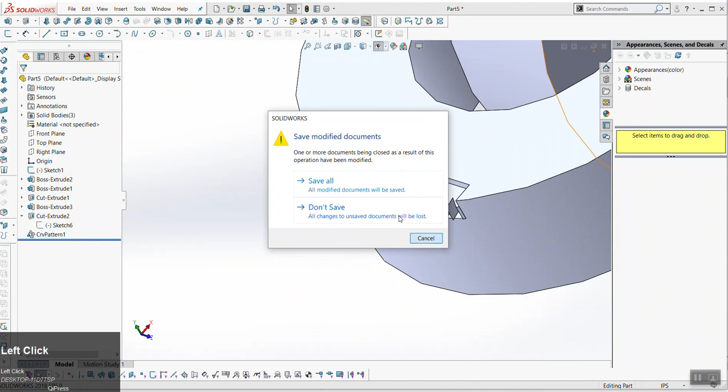I wouldn't go that far, I'll be honest with you. Let me say this: a curve-driven pattern, yeah, I think that's what the issue is. I think what happened there is that I'm going a little quick, but sometimes weird stuff happens. Like the curve maybe is not quite—the alignment of the initial cut to the curve is not quite right.

We had this conversation before about patterning features versus bodies, I think. It's always, in some respect, in this instance okay because it's teeth and it's a relatively simple procedure just to cut. So in this instance it's okay. If you are trying to be best practice and proper, patterning features in general is not robust, and it does lead to some of these things like we saw. It is possible, if you want to be nuanced here, instead of doing a curve-driven pattern.

Just like we discussed last class, it's possible to take this sketch. You'll notice there's a similar icon here, but there's no curve-driven option, or I thought there was, to do a pattern within a sketch driven by a spline.

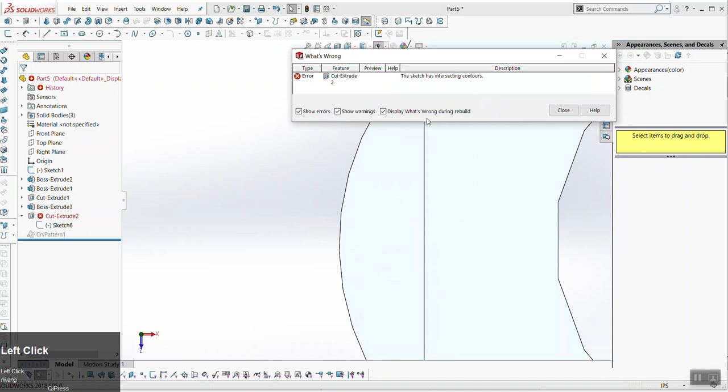I'll delete this. If I edit this sketch, the reason I want to be in edit mode is when I go to do the extrude cut, I want to be able to select the contours that I want. So in this instance, I could just come in here and select all of these contours. Again, it's more work because you're selecting all of these, but in theory, like you can see now, there's no error that we had before. It's actually following truthfully this gap and maintaining that.

So that was a good question to ask. Again, there are multiple ways to go about the same goal. In general, patterning features or mirroring features is a little bit less robust than doing it as a full body or within the sketch.

Very long answer to your question, but does that make sense? Do you see how much cleaner that is? Obviously there's a mismatch here. Well, actually, no, let's look at this. No, you know what, this is what it is. It's getting more narrow, but it's a little bit cleaner.

I think that's what it is, that this is not symmetric about the center. You're absolutely right. So this line here, if we want to fix this problem, let's see, we want to make these collinear to each other. And then we want to set this to be for construction, and set this to be symmetric about each other. Now it's not happy with me.

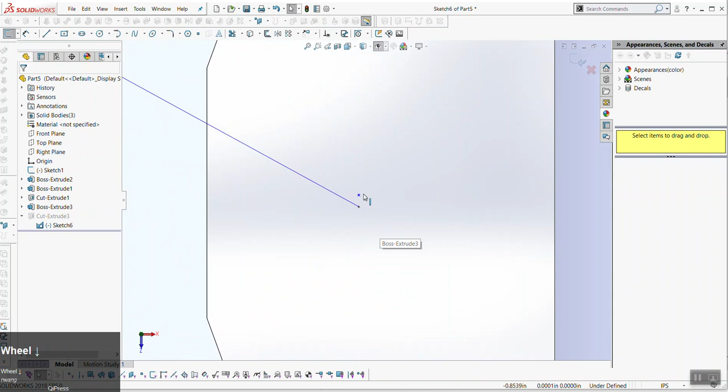Let's try that symmetry again. You know what, this is throwing me off too. I'm going to make these coincident and see if that fixes anything. Let's see if I can make this, I can make these symmetric. Oh, they are, they're already symmetric.

You know what, that might have been it. They weren't pointing to the center. It still wasn't pointing to the center. There we go, that was it.

No, seriously though, sometimes that is SolidWorks, figuring out geometric relationships and little things like that. That line wasn't quite pointing to the center, so as it rotates, it slightly gets off more and more, and then it gets skinnier. So sometimes you run into these weird, 'what is going on geometrically' situations and have to figure out how to fix that.

Sure. Right. No, that was good. That's totally, again, that goes on all the time. Yeah. Okay, cool. I think I saw that and I think I downloaded them. It's going to be tough. Oh, wow.

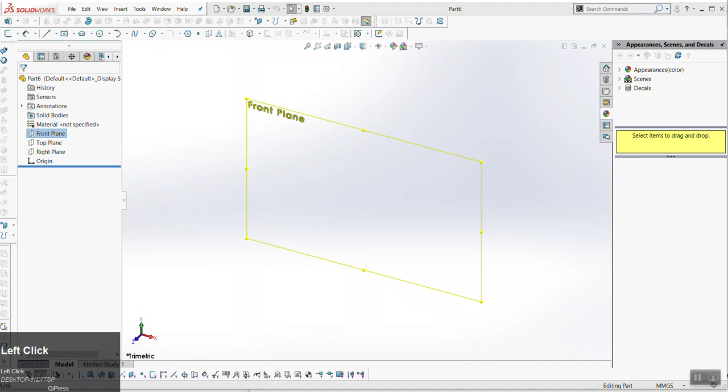Okay, here, I'll just jump right in. This is where my gut is, again on this top view. I don't know how long these ear pieces are. I would center the earpiece about this origin. What is that, maybe half an inch, 3/4 of an inch? Let's go 0.4 for the earpiece. Make sure we're in inches. The jaw part is probably like 1.75 inches long. Let's just call it 2. Not 12.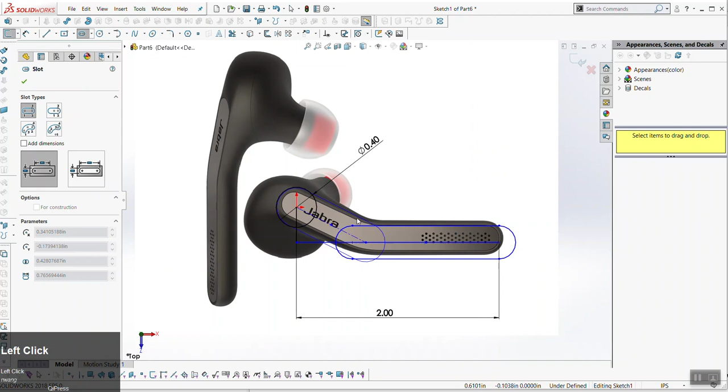So again, I'm just giving us a starting point for where this loft is going to happen. Again, I would take these slots, I would take more time to align them, I would extrude that and do a cut from an orientation going perpendicular to this, so going this way, to get that angle. But again, for now, I'm just going to pull this slot to begin with.

So again, imagine that I'm extruding this whole bent piece. Again, I'm just pulling this portion of the slot for now. Also in our top master is where we would have this shape. It's not a pure circle. Let's see how close it is to one. And I'm guessing this is due to the ergonomics of, like, the ear.

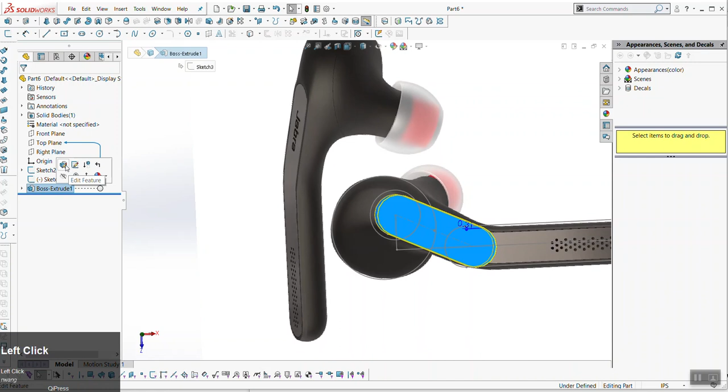In terms of matching the render though, if you wanted to do a circle, that is fine by me. It's close enough, I think. And I think there's enough complexity going on anyway, and that may simplify that blend a little bit. So, okay, let's see, same thing. Well, firstly, I extruded this too tall. I think just proportionally, this is not quite as big as this. I guess not that it matters for this.

I would approach this the exact same way as all of our other lofts. So, meaning to say, just going to pull this. I would split the body and do the loft in pieces, and that will make it more clean. And again, think about this as, again, a deeper dive into what we already learned before, like more nuanced. So I would split this along this line here. So using the split commands here and here. Again, sometimes it helps to pick opposites so they don't actually merge.

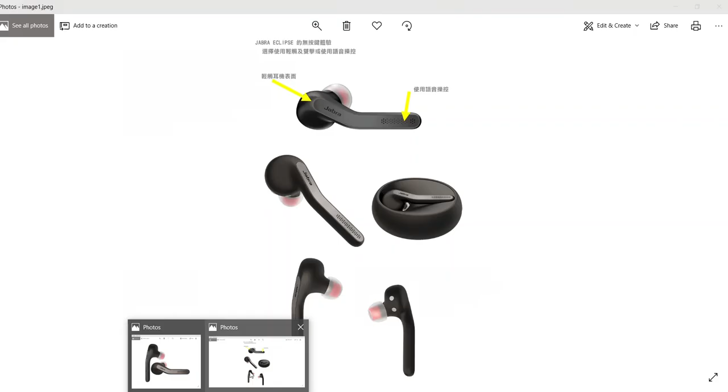And actually the way that I would have done this, here I'm using a bit of an offset. I can do this with a cut, but I'm just trying to leave a bit of a gap so that now I have room for the loft to exist with it. Does that make sense? Now, essentially, if I'm looking at this, let's go back to this view here. All right, it's going from the top.

Oh man. So why don't you start off with this slot instead of the cylinder? Like the earpiece? So see, for me, this is a flat with a fillet running around the edge. The reason I'm starting here is I think this is the most complex part, and I wanted to show you how to do that.

Again, honestly, this could be overthought. It is a bit of a cop-out to do this as a fillet, but you could, honestly. You could do that too. You could start with a sweep, I guess. This shape I would do as an extrusion. I would then cut it at this angle, and then I would fillet this bottom portion. The more that I look at this, again, it's a bit of a cop-out, but you may be able to just blend an extruded circle to this angle and fillet it out.

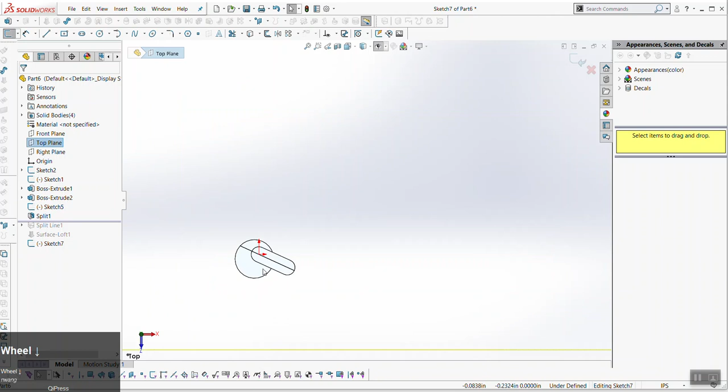Another way to do this, which is how I was initially setting this up, is maybe chopping it with this, let's try that. I want to cut the outside of this, right? Hopefully I didn't get rid of, yeah, I didn't, thank goodness. Again, this represents being merged into that other part of the noodle, and then with a fillet on the bottom.

But on a base level, with what we've learned in class so far, you could get away with a loft similar to this, with more control curves through here. So I would have a control curve from this corner to this corner. It probably would be beneficial to fillet this, which even though may seem weird at first, when you blend it into that noodle, it'll disappear.

The reason we're filleting this is the way that lofts like to work. Do you see how this has two corners? You want to go from two corners to two corners. You don't want to go from three corners to two corners. Does that make sense? So that's why I'm filleting this edge here. In this orientation, this is not on a clean face. So I'm going to sketch on here.

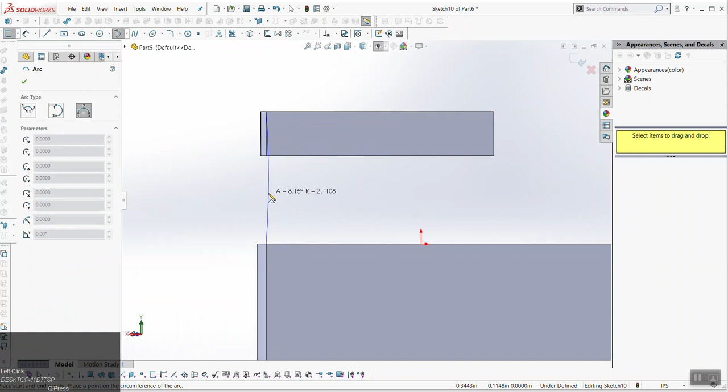Again, I'm just making guide curves for my loft. The more guide curves you have, the more successful your loft will be. There is a chance that if this gets too acute, it'll hurt the loft, but we'll just see if this works. I'm doing 2 independent sketches. You could do it in the same sketch, but let's see, this looks like a straight blend. This would be another instance where you could take away some of this guesswork by doing it with a spline. And the way that I like to use splines is not with any vertices in the middle.

Oh, of course, this is a straight cut. This one I'm going to do with a straight line. The reason why it's a straight cut is I used the profile of this circle to get this sketch. Okay, so now we have 2 guide curves. Let me hide this reference image. I can now loft this face to this face, and now we can try and use these guide curves. That might be too acute. Seems to be working. Let's try this.

Where it's not merged for now. That's pretty close to how you might want to start this, or at least do that complex area. You would then do the exact same thing on this other side. And now when you do build out this noodle, this is incredibly rough, but I'm just going to run with it. I always kind of pull these out longer, trim this. Whoops, I went the wrong way. Let's go down.

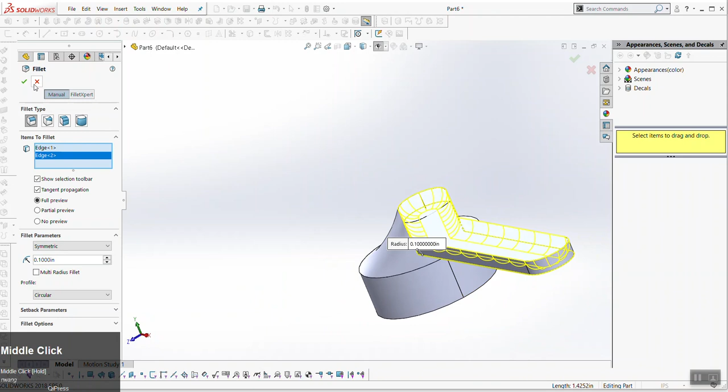You know what? No, I don't want to merge this quite yet. This is the way that I see the noodle, as having a big fillet on this face here. But this loft may get you close enough, and this is kind of tucked away, once you get those fillets in there and you do get this merged.

So again, there's a combine feature. I guess this is a new feature, guys. So if you're working on individual objects, at the time when you're ready to combine them, you can select all of the bodies here. It's called combine. You can join them.

You can then fillet out like this last blend in here, since it's at the bottom. It's kind of hidden. Does that make sense? That's probably the most complex area, and again, that's how to approach it. I would just treat it as a very simple loft, or try and treat it as a loft by doing it in halves. Does that make sense?

The other hard thing, other than figuring out that area, let's look back at this. So you'd probably have a similar loft on this other side. I think, again, that will get you close enough. Now, the challenge is, I'm making an assumption here that these two are facing the same way. The more I study this... The other challenge is just getting the orientation of all these things correct. They're all pointing slightly different directions.

So it looks like this noodle is at a slight angle to this sort of disc. Meaning to say, right now I have this and this parallel to each other. I don't think they're parallel. I think they have an angle relationship. The good news is the loft should still work even at an angle relationship.

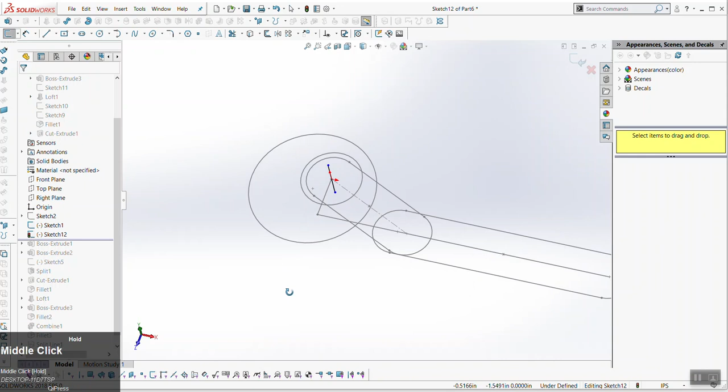You probably want a master sketch that gets all of these angles. So this represents the main body in the center that I'm representing with a disk currently. And again, this is complex enough that if you want to treat that as a disk, that's fine. The noodle comes off to the side here, but it also kicks at a slight angle. So from this orientation, you probably want to extrude it on a plane going this way, because it's at a slight angle. Does that make sense? I could probably draw this better, so I'm sorry it's going to go away from the recording.

But the way that you might want to start your master sketch, and again, because you don't have a physical object, just do your best to guess. You can see the way that I started my master sketch was with the overall 3D shape. However, these are all going at different angles. The way that I interpret this is that there are 3 major angles, but the problem is that they have very complex relationships to each other. So again, the starting point is you have your main circle shape.

And if we call this the 0 orientation, this is y here, right? This is the y-axis. Your noodle is at a slight angle here, right? So you want to project whatever this angle is perpendicular to this to get this noodle at that angle. So you have the 3 things: the noodle as a speaker, the main body, and then an earpiece, which is going off at a different angle.

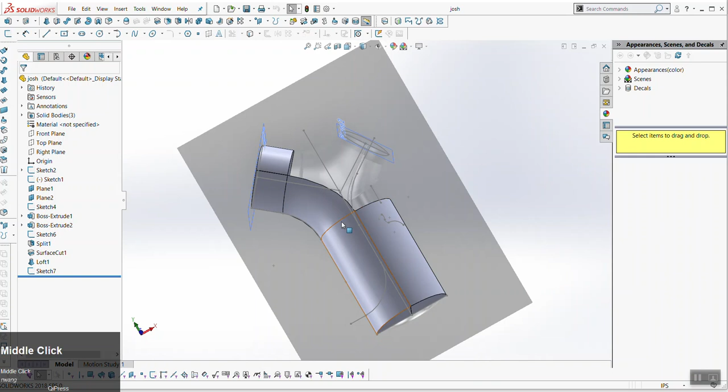All right, so let me just complete some of this stuff. Yeah, that works, that works. Okay, sorry, it requires a little bit of setup to try and get this to go.

I'm repeating this again: if you guys need to cut something in half, you can select the front plane or the plane you want to cut with. This is a new command called surface cut, cut with a surface. You're using the plane as a surface. You look at where the arrow goes, and it blows away everything on the opposite side.

So I'm just going to loft here to here. Hopefully these play nice. I'm not going to worry too much about guide curves. Guide curves typically help, but for now we're not going to merge - that's what my gut is telling me to do. And then this here, we're going to loft this to this. Again, hopefully none of this is new - it's all just solid body lofting, faces to faces.

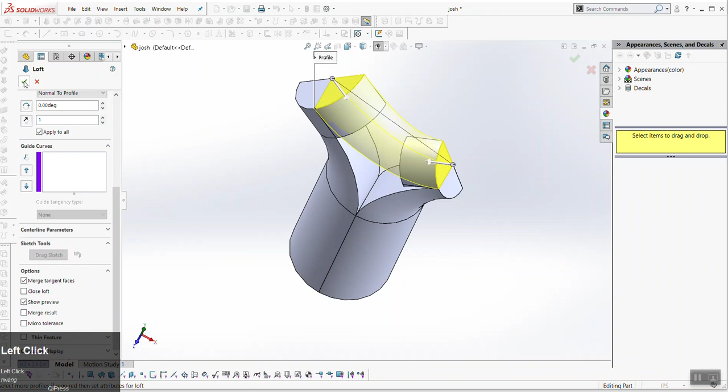So this is the crux. I showed you guys how to start a lot of your files. The challenge here - oh wait, I went to the wrong face here. Well, that's fine actually, let's leave it. Honestly, that's really only half the battle, getting set up. The other half is completing this. So you may run into instances that look like this, okay?

Surfacing is building with just - if you want to think about this as a piece of paper, it's building with just pieces of paper, as opposed to a solid piece of foam. That's the best analogy I can come up with.

One of the challenges with surfacing is once you enter surface world, you kind of have to work - it's not enough. I could surface out this hole right here, but then I'm left with a surface and three bodies touching it, okay? You kind of want to enter completely into surfacing.

One very quick and easy way to do that is by just straight up deleting faces. Again, this is a surface tool called delete face. If I'm trying to fill this gap, I can delete out all these faces. And what that's going to do is change my solid bodies here now into three surface bodies, okay? You can see the face is actually missing, and these look like pieces of paper. Now there's different tools to use with surfacing - there's the loft tool, like I showed you guys.

What did you say, boundary surface? Boundary fill. There's filled surface, which I would - for this sake I'm probably going to just use for simplicity. This is not planned out well, as you guys can tell, but there's a chance this won't work. But filled surface is a very simple way to basically be like, hey, I have a hole, I want it to be blended away, okay?

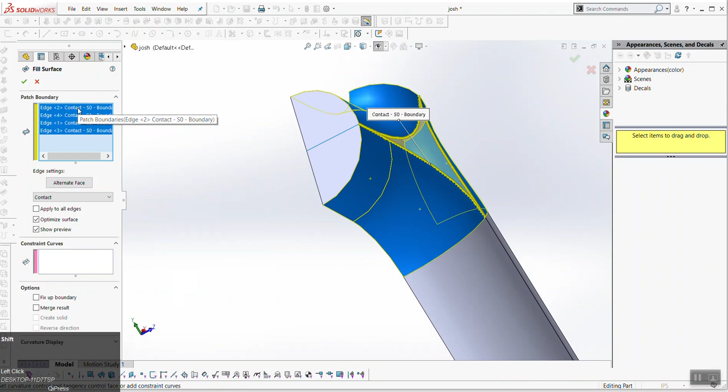Now these edges, you'll notice they all say contact. This may fail, but ideally we want this to be tangent because we want it to be smooth. Yeah, do you see that? That's always fun, things like this happen. You can always see how many you can get to be tangent.

This is really just - again, this is a very simple patch. The problem is, without it being tangent and without planning this properly, you kind of get wonky things going on like this.

Now, let me show you one way to fix what's going on here. And then I'll wrap this up and give you guys back your grades. Sorry today was long, but I appreciate all of your attention.

So this loft gave me this curve, okay? So on this front face, I'm pulling this sketch from this curve. Now, you know what, I'm forcing a lot to happen within here, within this triangle. So here's another way that I could approach this.

I could say - I could do this maybe as, like, where did that go? I could delete this away. And I could do this as a loft from here to here.

Okay, I'm going to go back to this again for its sake. What I was going to show you guys is another way to do this is to limit the tangency. So instead of having it fight between the three, let me try this. Let me see if this works.

Sometimes when there's more space in here for it to work, this surface fill should still work across all of this. It's just not quite as clean because it's now covering a larger gap. But what this affords us is there should be more room for these tangencies to work. It's not as constrained, so it allows more room for the blend to happen.

The issue, I believe, is being caused because it's coming to this point. Anytime you're trying to blend something, if you give it a little more room to breathe, that blend will work. So how I would fix that, if I had more time here, is instead of trimming this right down the center, I might trim this to here and this to here, leaving about a quarter inch gap. That's going to allow more room for that tangency to work.

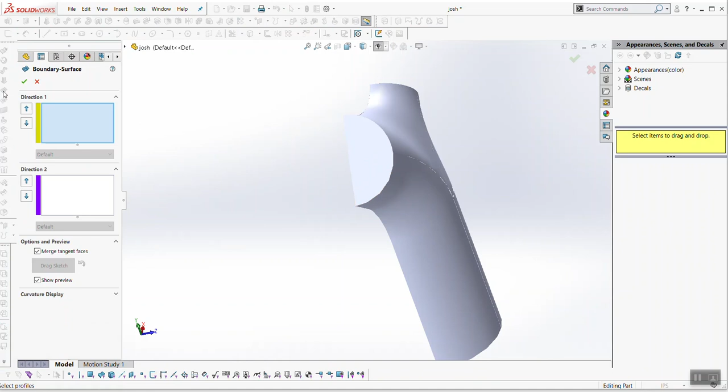To complete this, essentially all you do—so again, you got loft, you got boundary surface, you have fill surface. Fill surface is the most simple, and this is a total crash course in surfacing, I realize, and we can get more in depth into this. But whatever you do to the outside, you want to also fill on your inside, and now you should see that I have an object completely constrained by surfaces.

It's just like a sketch when you extrude a closed contour. You don't want to have overlapping lines because you'll have an error. You don't want to have overlapping surfaces. The last thing you want to do to make this a body is use this command called knit.

It always looks like a vest to me. But you select all of these surfaces. Hopefully you're not missing any. You check create solid. You hope the SolidWorks gods are with you, and they're not. But you click check, and it should form a solid body. I think what's going on right now is that the point is what's causing issues here.

Again, guys, do the best you can. I'll be honest, these are great selections. More power to you. Do the best you can. If you need to use filleting as a form of modeling, know that that's not best practice, but for an intro to SolidWorks class and for simplicity, if you need to do it, it's okay. Just try and break it down into steps. There is a lot of trial and error.